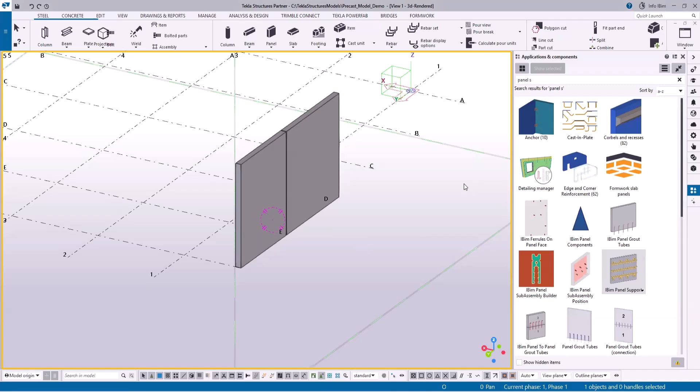Hi everyone, in this video I'm going to give you the demo of this panel support application. This has been upgraded to WPF. Let me walk you through how this application works.

Select the component. You can pick a single panel or multiple panels. Let me pick these two panels, press the middle mouse and pick the first point and second point to create this component.

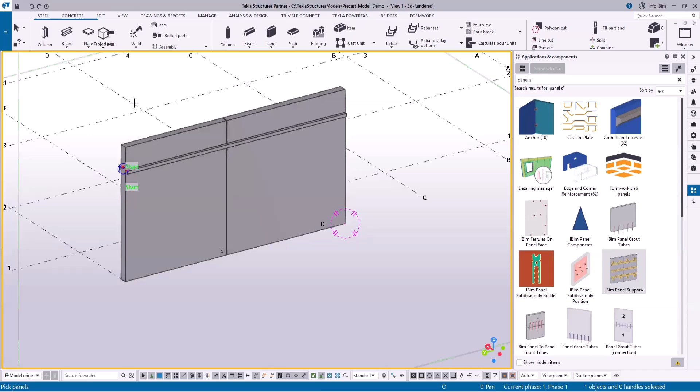Let me just double click and open the component. You can change the properties of the support, cleat, washer plate and clip. Let me just go through this one by one. But before that, I just want to change the rotation, so let me go here and change this one to back.

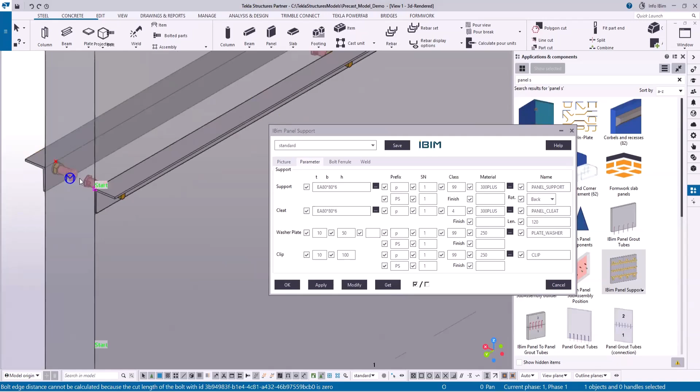Let's see what are all the options available in the component. So you can see cleat. Let me select the cleat and modify.

To change the bolt, go to the bolt ferrule and select this option. So you can apply this one to near side or far side.

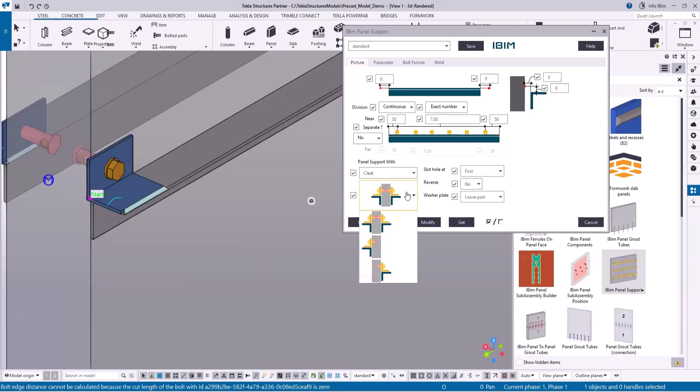Let me take the next one, cleat with washer plate. This will add washer plate. This washer plate can be a loose part or assembly. You can choose this option here.

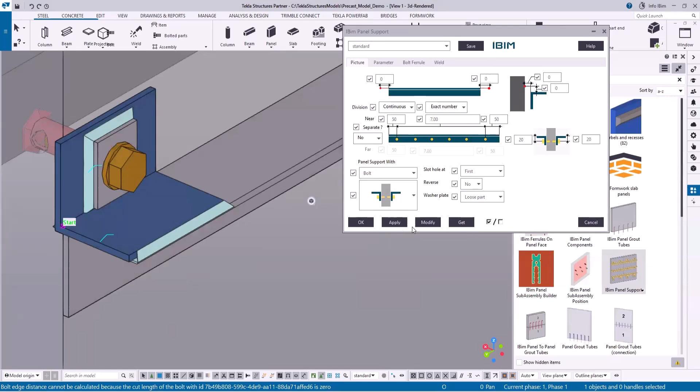The next option is bolt. So you have different options here. You can add both near side and far side. Let me just take this option. And the next one is bolt with washer plate. Let me move the distance.

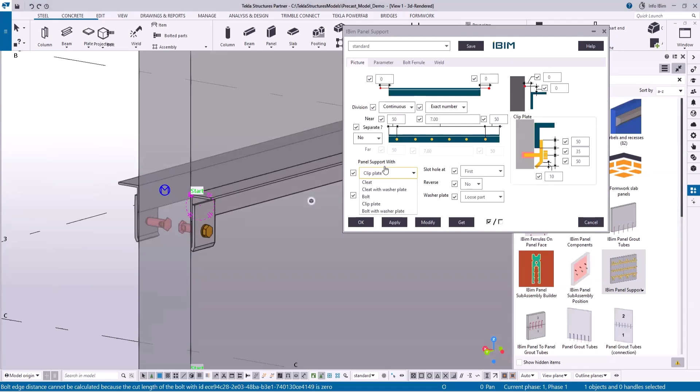And the next one is clip plate. So you have 5 different options to change inside this component. Let me select bolt.

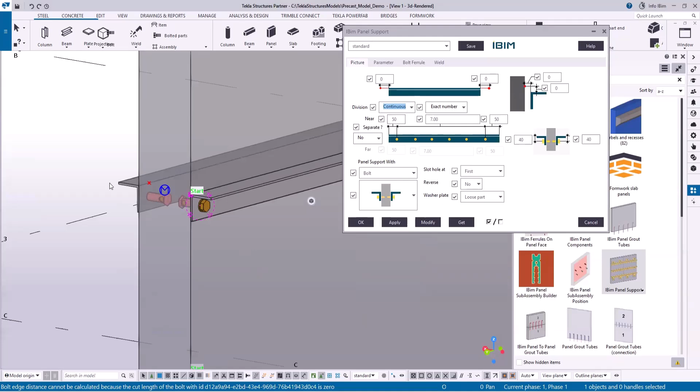So this is the offset distance from the start of the angle and end of the angle. You can see there are 2 options here, continuous and by panel. Continuous, which means this will add total 7 bolts and ferrules.

You can see here. But if you change this one to by panel, that means it will add 7 bolts and ferrules to each panel. You have options to change exact number, target spacings and exact spacings.

And this is the distance to offset the bolt from the start point of the member. And if you want to have a separate distance for both near side and far side, you can change this option to yes, so that you can change the values.

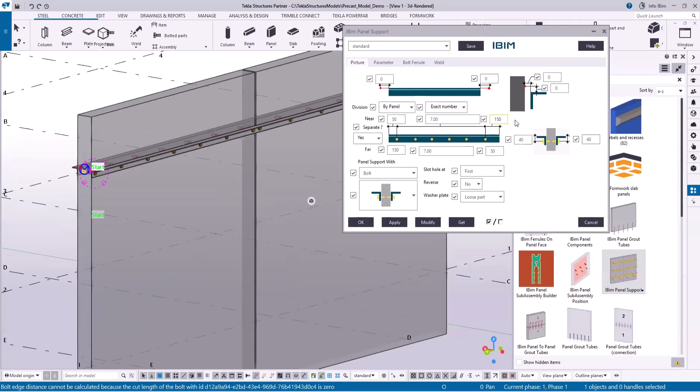Let me make it 150. And for the near side, let me make it 150 here and modify. You can see here, sometimes we type like this to avoid the clashing with the 2 bolts.

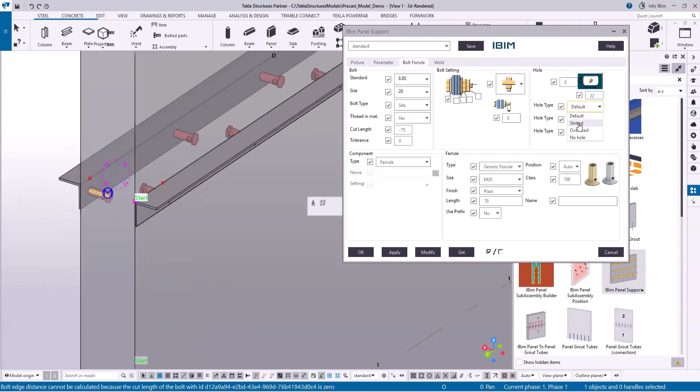If you want to add a slotted hole to the first or last bolt, you have options here. Just for an example, when I select first and then go to the bolt, let me change this one to 22 and I choose this slotted and click modify. You can see the slotted hole here

for the first one. If I change this option to last, you can see the slotted hole here.

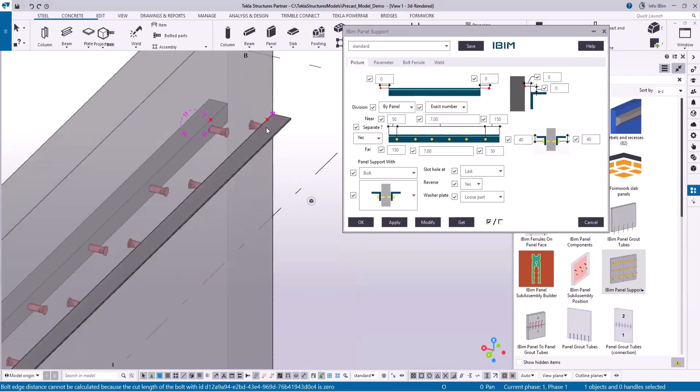But you can also reverse the order. For example, if I change this one to yes, that means for the far side, it will add slotted hole to the bolt on this side. And for the near side, it will add slotted hole on this side.

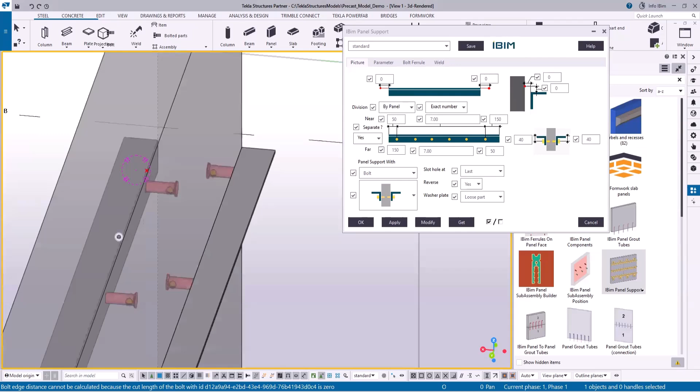Let me show you. So you can see the slotted hole here. And for this angle, you can see the slotted hole.

The reason why we do this is because when you perform numbering, these 2 angles will get the same number.

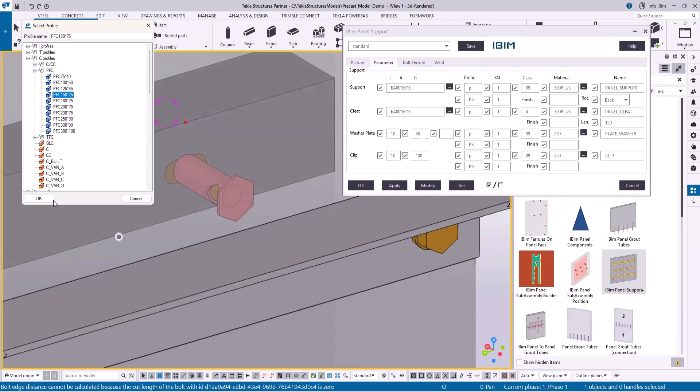This support can be equal angle or channels or unequal angle. You can change the profile. For example, if I go to this channel, change this profile size to 150 and modify.

And I'm going to change the rotation. Move the bolt from the top. And if you want to offset the member, vertical and horizontal distance, these options are here.

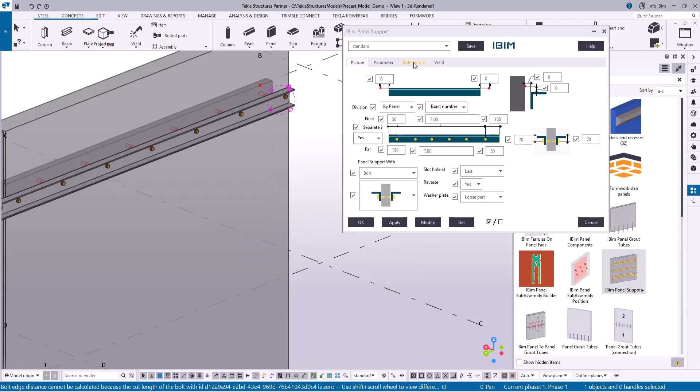And then let me just go to the bolt ferrule. So you can change the bolt settings. Here you have three options: none, ferrule, and component. None, which means it will not add ferrules to the bolt.

If you choose ferrule, it will automatically enable this field. You can choose any one of these options: generic, Ancon, Reid, and ferrule. For example, if I select this, it will automatically update the list.

Let me change this one back to generic. If you change the length and click any other field, it will automatically update the name.

So you have options here: auto, near side, far side, and both side. Auto, which means it will read the panel form face and assign the position to the ferrules. But if you want to force it, you can choose this option.

And here you can change the ferrule prefix. You can see the part assembly start number and assembly number. Finally, if I go to the weld option, this is for the clip.

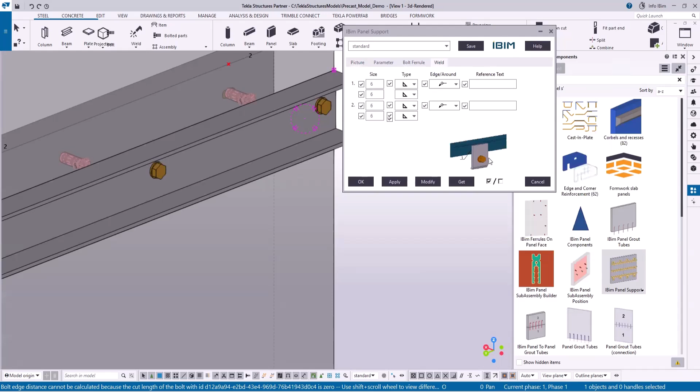So when I choose clip plate here, number one for this clip plate, if I go to the Cleat with washer plate, so now you can see the options. So this application will be very helpful to create the panel support with just 2 clicks,

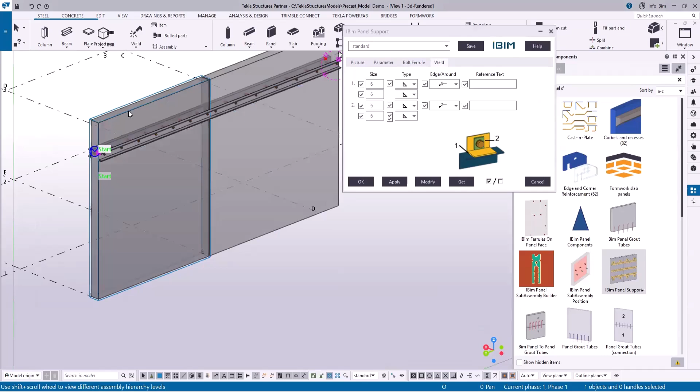because you don't have to add the ferrules as sub-assembly. Let me show you. I'm selecting the panel as assembly, right click and hide. You can see the ferrules are not visible, that indicates all the ferrules are already added as sub-assembly to the respective panels.

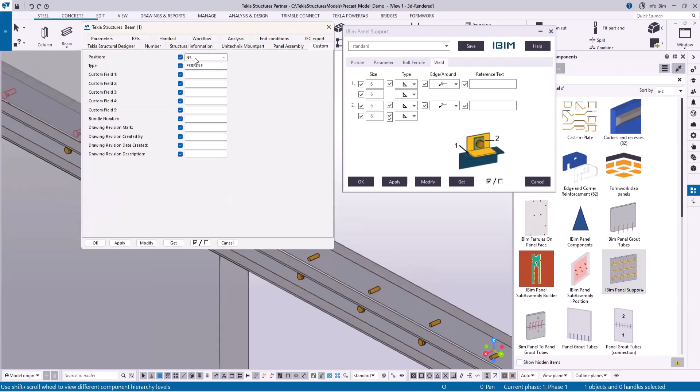If I inquire this user-defined attribute, if I go to the custom, you see the position and the type. So it actually eliminates a lot of manual work.

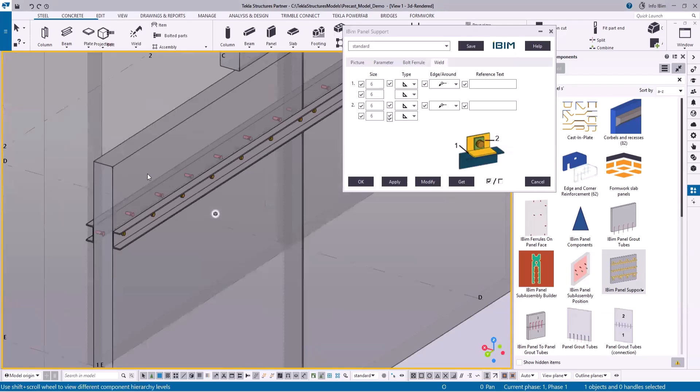As you have seen, it is just a matter of selecting the panels and pick 2 points to create the panel support with different options. So if you have any question about this component, feel free to reach out to me, and thank you for watching this video.